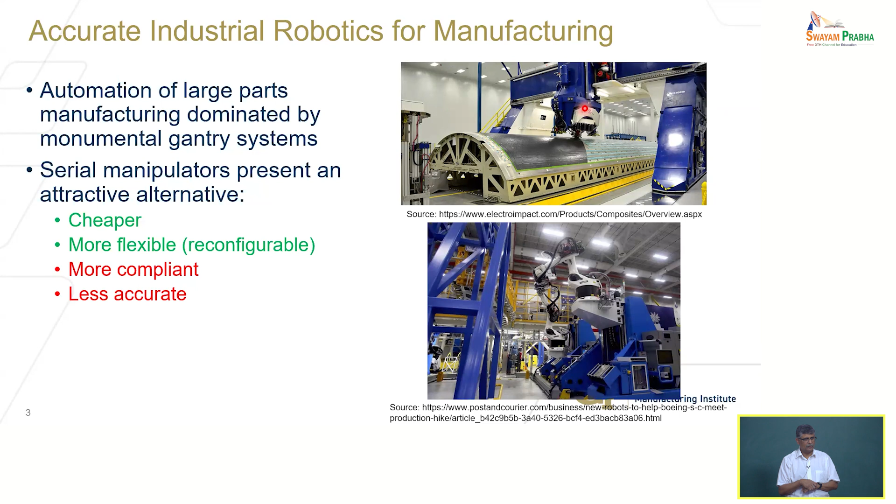So these are challenges with robots. This statistic you can take with a grain of salt. Very few robots generally, whether it's less than 2% or not, I don't know. Alex Verl is a professor at University of Stuttgart, a colleague and friend of mine, and we participated in writing a paper, and the Germans came up with the statistic that less than 2% of industrial robots are used for machining type applications. The only machining application robots have been used for has been in a foundry to actually cut out flash from castings.

That doesn't require very high accuracy. It's just removing excess material squeezed out from the mold during casting. Similar work on polishing and grinding has been done. It's done in industry today, but not for milling operations, where you produce complex contours that may be necessary for aircraft structures. Most aircraft frames, whether metal or even today's composite aircraft—commercial aircraft have composite skins—have to be machined, trimmed. You have to cut out holes. There are tens of thousands, if not hundreds of thousands, of holes depending on the size of the aircraft that have to be drilled. Then fasteners have to be put in, sealant applied, and fasteners fastened to the frame.

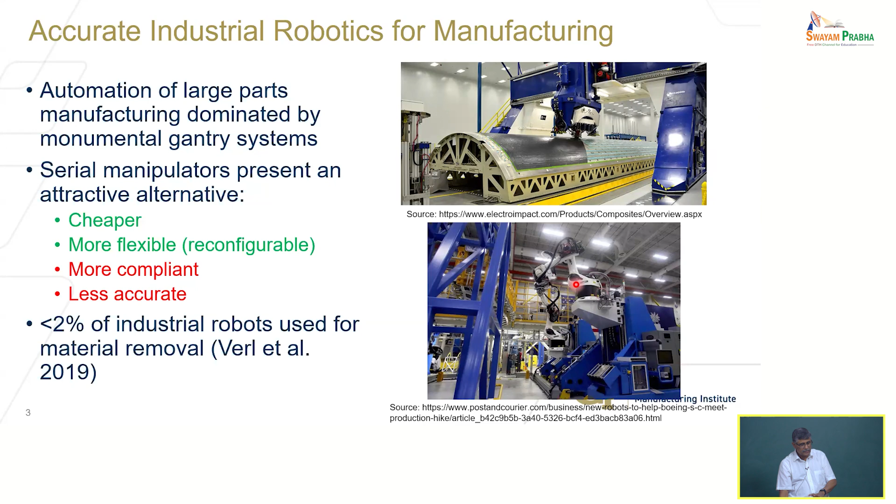Now, you see here an example—I don't remember this one exactly, but this is probably a robot doing drilling. It's called the QuadBot system, and there are 4 robots doing drilling. But here, the robot is primarily being used as a positioner, simply taking it to where it needs to go. They have enhanced the accuracy of this for drilling. There's an auto feed drill at the end effector that positions the robot at the right location and clamps down on the outer surface of the skin, gets a grip, puts the skin and frame together, clamps down, and then drills. That's the level of automation that exists today in practice.

Well, what motivated us to try and say, oh, we need to make robots more accurate than they are? Here's one example—I don't know how many of you know. If you've flown on an airplane, you may not have seen it, but you have sat on an airplane which exhibits these characteristics. Most airplanes flying today, actually all of them, when they're produced, are assembled. That assembly process is very time-consuming, especially for large planes—it could take a few days to assemble the wing to the body. Each fuselage section, depending on the type of aircraft, is made in separate parts: there's an aft section, mid section, forward section, and these are brought together and mated.

Now, if you think of composite structures, accuracy of manufacturing is difficult. They cannot be made precisely—the fuselage is not a perfect circle. It's some geometry, but controlling the geometry during composite manufacturing is difficult, so there are errors.

So when you bring two pieces together, like the wing to the body or two sections of a fuselage, to join them, there are gaps and there are interferences. So what do they do? They bring them together, measure them with very sophisticated metrology, then join them, measure again to see where there are gaps, and then go make shims, essentially materials used to fill the gaps, out of fiberglass, composite, or metal, depending on what it is. And there are thousands of them on an aircraft.

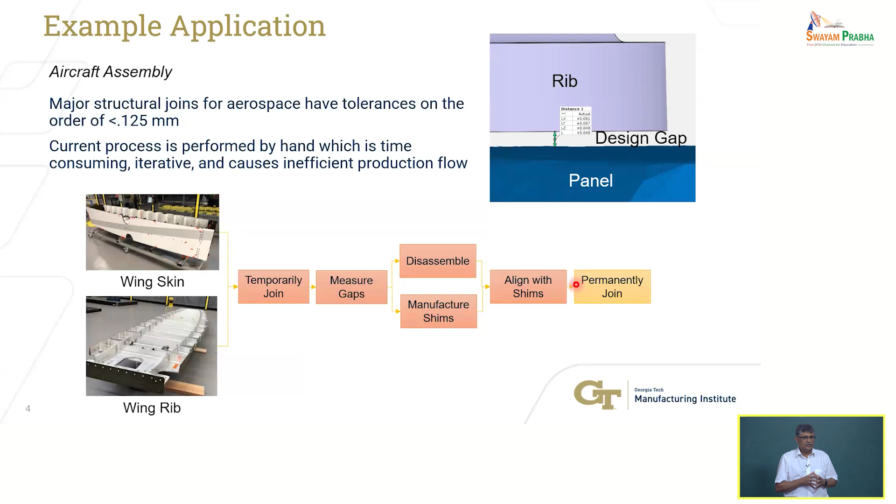So you're adding mass. Wouldn't it be nice if, instead of adding weight, which is bad from a fuel efficiency standpoint, you use composite to lightweight the aircraft, but now you're adding more material because of your inability to produce things very accurately? So what would be nice? These shims are produced in a machine shop and brought back, which takes time as well. Now think of this scenario.

So this is what I described. This is saying the same thing I just described to you in words. So what do they do? What is an alternative approach?

An alternative approach would be that I don't try to make my structures very accurate, which is good, it costs less to do that. Let's say I make one of the fuselage sections slightly larger on the inside diameter than the other, so there will be deliberate interference. Now I bring them together and measure how much interference there is. I have to do that. Then instead of making shims, I just bring a machine and machine it to size, so I don't need to add any new material. And I join the two. That would be called shimless assembly, without using any shims.

That is not done today. Today what they try to do is predict the thickness variations and make shims ahead of time, then do the assembly. So this is one motivation.

Now, if I have to machine this fuselage on the assembly line for a large airplane, I can't take a gantry machine there, or transport that big piece to the gantry machine at some other facility where the machine tool is. Instead, if I have a robot that's accurate enough, I can put it on a mobile platform that can rise up and down. I've measured where the interference is, and I can go and actually machine it to size. That's one potential application, not the only one. Robots can be used for painting, sealing, and all kinds of other applications, or trimming composite structures.

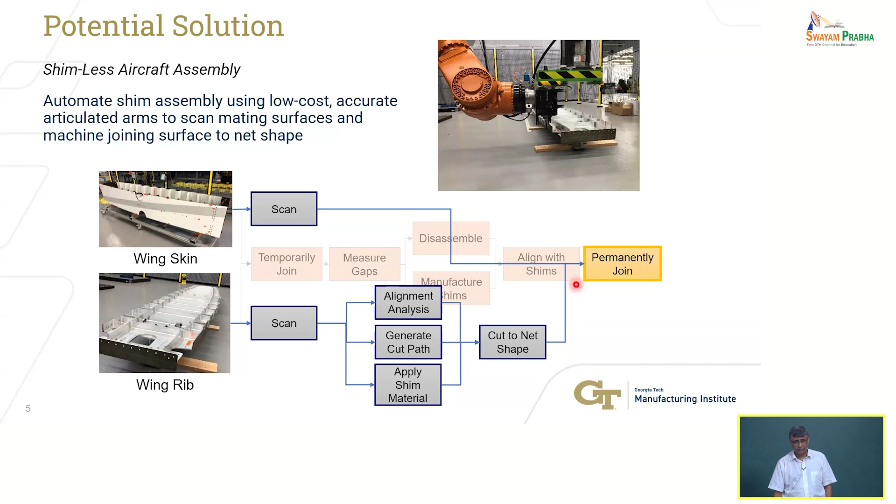To illustrate, this video shows a typical robot machining shims attached to a model wing rib. A wing rib is a rib inside the wing of an airplane. You can see it's a 6-axis, 6-degree-of-freedom industrial robot, similar to the one you saw but much bigger, with a much higher payload, with a machining spindle at the tip, and it's machining these fiberglass structures attached to it. These are shims that minimize the gap between mating structures.

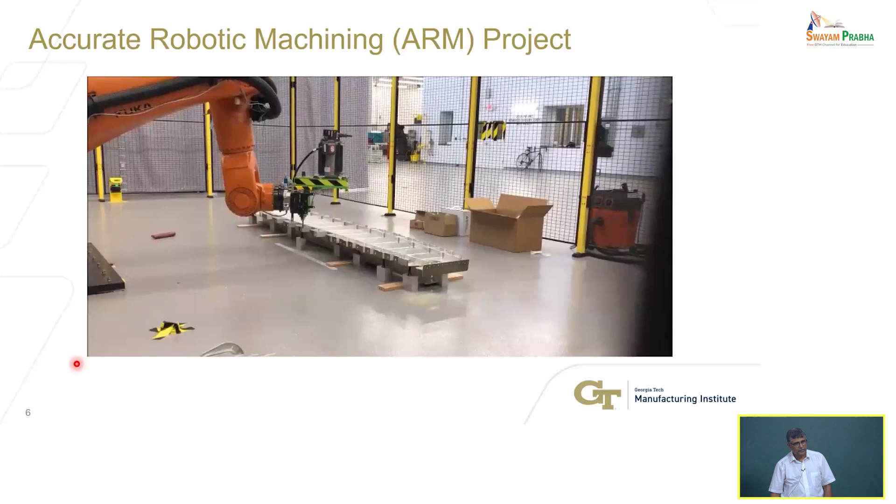So that is kind of the application. We want to be able to do that on the assembly line using such a robot. What makes it difficult to do today is the question. Robot accuracy is the challenge.

Most people don't realize robots—they think robots are very accurate. No, robots are very repeatable. If you buy a robot, the manufacturer will only quote you a repeatability value. They'll say it's repeatable: if you teach it to go to a certain point manually and ask it to go thousands of times, it'll return within 50 microns of that position, which may be good enough for many applications. That's repeatability. But accuracy would be, if I ask it to go to some specific point in space through an offline program, how close to that point does it actually go? And unfortunately, most robot manufacturers will not give you an accuracy number.

They cannot, because of many error sources that are there, some of which I mentioned earlier. So as a consequence, what happens if you were to do that? The best accuracy with the best calibrated robot might be slightly less than a millimeter, a few hundred microns if you're lucky. Well, that's not good enough for a machining application. If I can't position the robot precisely along its path to cut something within, say, 200 microns for certain aerospace applications, or less than 0.125 millimeters, it's not good enough. So repeatability is specified by manufacturers, but not accuracy.

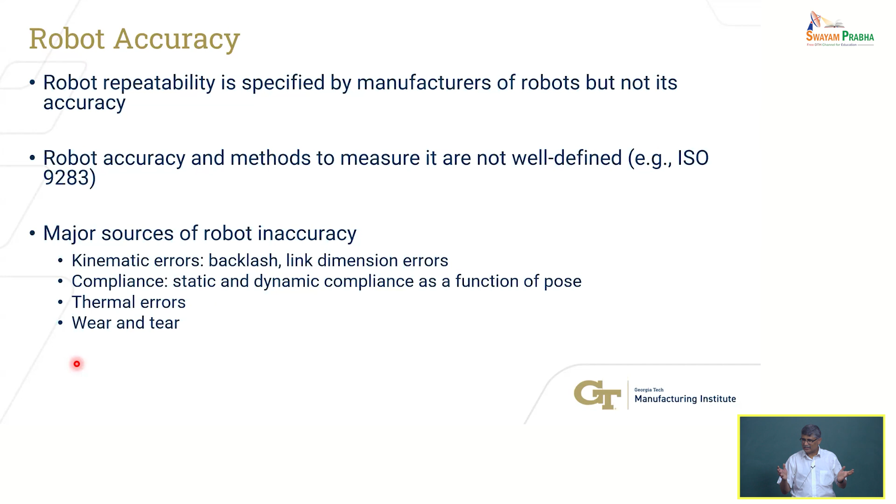There are other errors, like temperature variation. This is not even accounted for explicitly, though it's mentioned in the standard. In most manufacturing environments, like a foundry, the temperature variations can be huge, and thermal expansion and contraction effects can also affect accuracy, along with wear and tear. So, basically, if you have less kinematic accuracy than CNC machine tools, you'll have more inaccuracy of the part, along with compliance effects. I won't repeat all of this, let's move on.

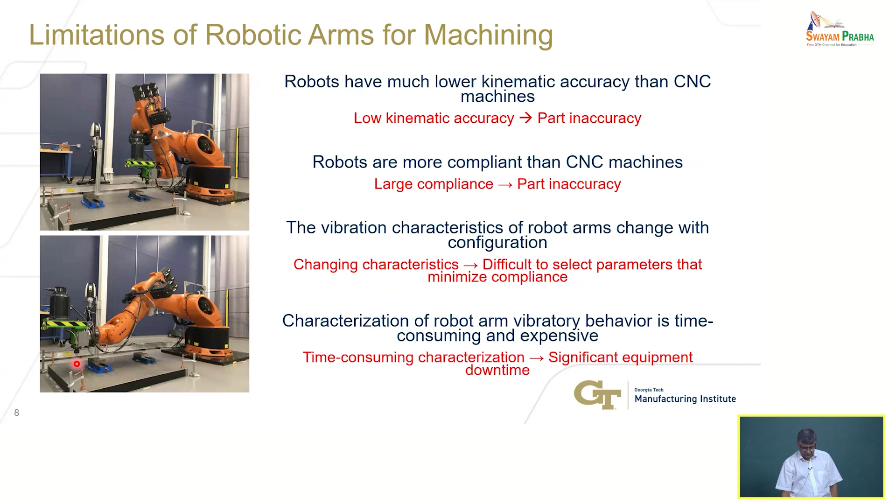So how do we go about addressing some of these limitations? That's what we tried to do in our research. One of the first things we did was ask: can we compensate for the static deflection if I were to use a robot for machining? Let's say I'm milling a slot with a robot - there are forces acting on the robot arm. Can I estimate what the forces are, and using knowledge of the forces, estimate the deflection based on the stiffness of the joints of the robot? I won't teach you all of this - if you haven't learned it, don't worry. Just take my word that you can use forward kinematics to relate joint compliances to the Cartesian compliance, and can I use that knowledge?

If I know the force acting at the end of my arm, and I know the stiffness at the end point of my arm, can I predict the deflection? You all understand F equals Kx, like a spring. So it's like a spring. I know K at this tip, I know F at any point in time and space, I can calculate X, right? F over K gives me X. That's the basic idea.

The mathematics is more complicated because your kinematics is more complicated, okay? So let's not worry about that.

So how did we go about addressing this? Machining is more complicated. Machining forces vary with time in a milling operation, particularly. And as you're moving, just like we were talking about micro milling, the milling tool moves, your arm is changing. The extension of the arm and position of the arm in space is changing. And as I already said, the stiffness of the arm changes with its pose. So you have to be able to predict its changing compliance. You have to predict or measure the forces somehow in real time, and then be able to estimate the deflection and compensate for it.

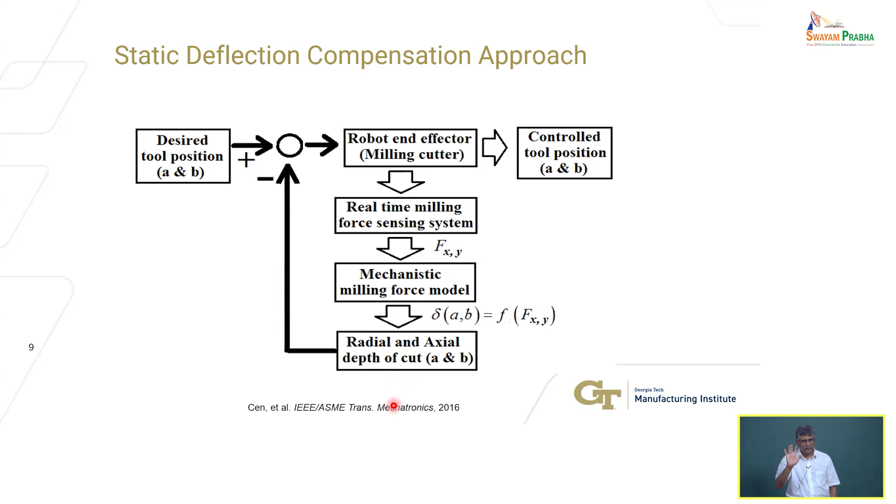So what are the things I need to be able to do this? I need some way of measuring the forces. I need this model that relates the force to the instantaneous depths of cut. And then I need to just be able to solve for these. As long as you understand the basic idea, don't worry about the mathematics of this. I'll show you some of the mathematics, but I don't want to confuse you more. I want you to just remember the basic idea.

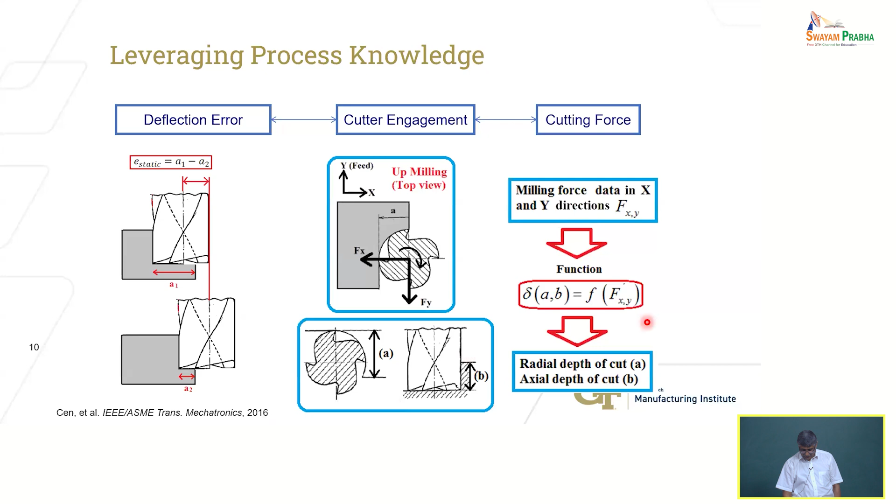Force, deflection. It's F equals Kx, that's the idea being used here. So I can compute it, I can do this. This illustration is simply saying the same thing that I described now.

Now, how do I measure the force? You have a rotating tool in milling. I mentioned before there is a piezoelectric force dynamometer that exists, but in practice you're machining a very large structure, and we don't have such big sensors. Now, there are rotating tool dynamometers available too. They exist. And for robots, you can buy force sensors that you can mount on the end effector, 6-axis force sensors. They exist. But in this case, what we did is we actually developed our own sensing technology.

This sensing technology is a very low-cost, non-intrusive sensing technology. Non-intrusive because you're not modifying anything significant, not modifying the mass or the stiffness of the structure on which you're mounting the sensor. That is what you want to do, right? I want to sense something without significantly modifying its characteristics.

So what is this sensor? This sensor is a thin film sensor, basically called polyvinylidene fluoride, PVDF, routinely used in many other applications. PVDF is a piezoelectric polymer film. It's the same principle as the other dynamometer referred to, the piezoelectric dynamometer.

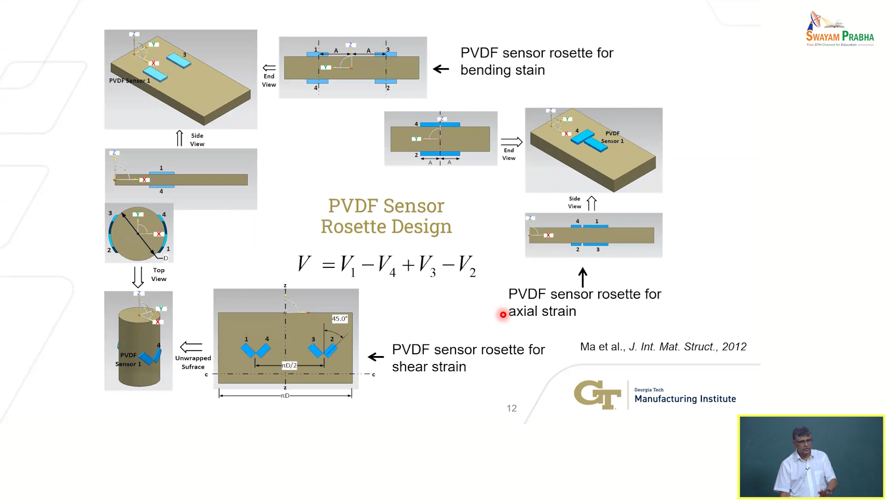I'll skip this. This is showing you how those sensor configurations are that allow me to measure the force I showed you. It's not as important. Let's see if this is showing you on a milling machine using the sensor that can measure torque. You can measure torque, you can measure Fx, Fy, Fz. You can do all of those things with the sensor.

This shows you measurement of the torque in a milling operation with that sensor. The red is with a dynamometer. That is the gold standard, a tabletop quartz-based piezoelectric sensor that some of you mentioned, people use in research, but you can't put that on the robot arm. So this is showing you that using this thin film sensor, you can get similar performance or similar measurement characteristics as you can with that more expensive one.

That dynamometer can cost you $20,000 to $30,000. That's what it costs. I don't know how much that translates to, but maybe 2 lakhs or 3 lakhs of rupees, whereas this sensor is $5 or maybe total $100 cost, which is about 8,000 rupees, or 9,000 rupees.

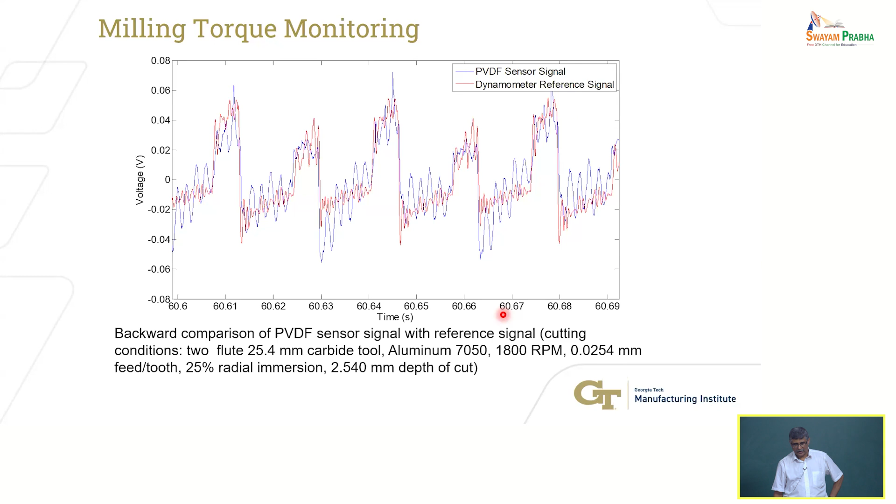How do you use this PVDF sensor in your work?

If you want to use regular strain gauges and measure strains, then you have to build a Wheatstone bridge circuit to measure the strains and separate out the different strains. It's the same idea, but we are using 4 just to be safe. They are mounted on the periphery of the shank of the end mill. And as the tool is rotating and subjected to forces that are changing during cutting, it is undergoing these strains. These strains are being measured, and are being transmitted and converted into force. Does that make sense? At least conceptually it makes sense. All the math I'll skip, we don't have time for it. As long as you understand that, then you're fine.

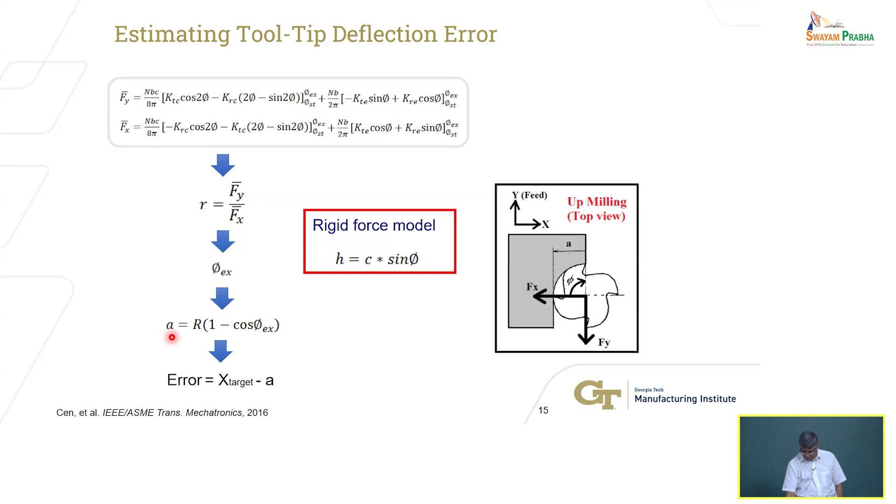Now, we implemented this to see how well we do. Does it improve my accuracy? Which accuracy am I trying to improve? In this case, the radial depth of cut accuracy, because I'm estimating only that using the sensor, and I'm compensating for it in real time, making the robot move.

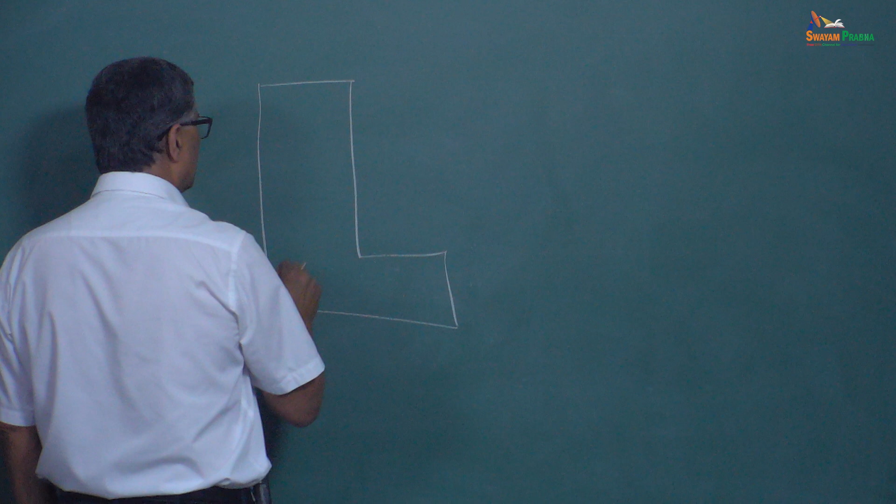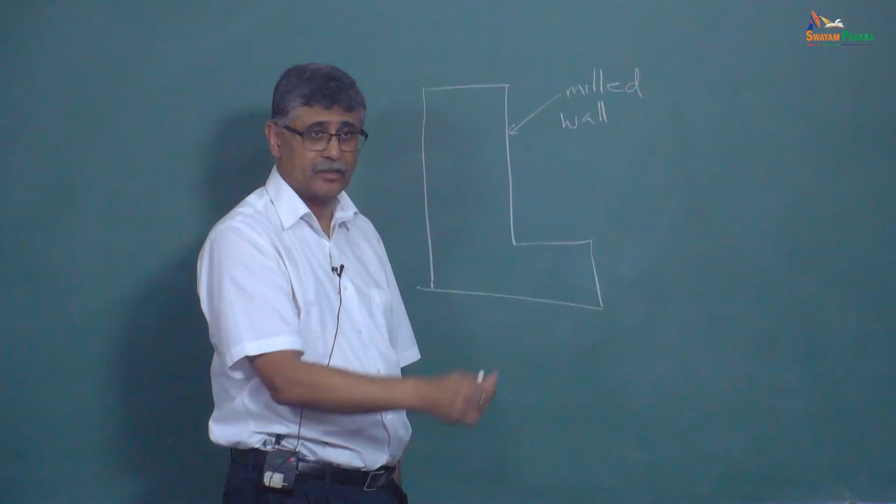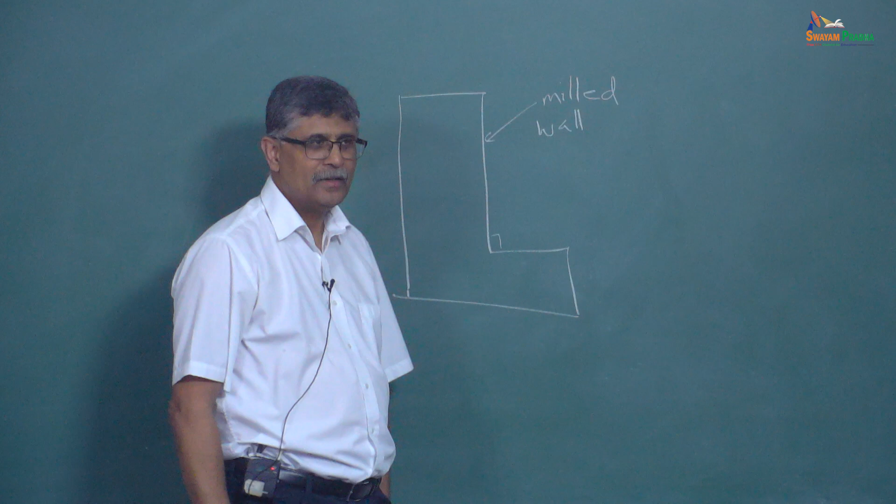So what this is showing you, imagine this is the milled wall location after machining. If you're doing a milling operation on the side, you create a step, something like this. Let's say this is the wall that I cut, looking at it from the end, or in cross section. If my robot was perfectly rigid, this should be 90 degrees, right? The robot is not rigid. Even a machine tool is not perfect; the cutting tool is also not perfectly rigid in a machine tool. So there will be some variation. Now, the tool is fixed here, up here, the robot is here, the machine tool is here. It's like a cantilever beam.

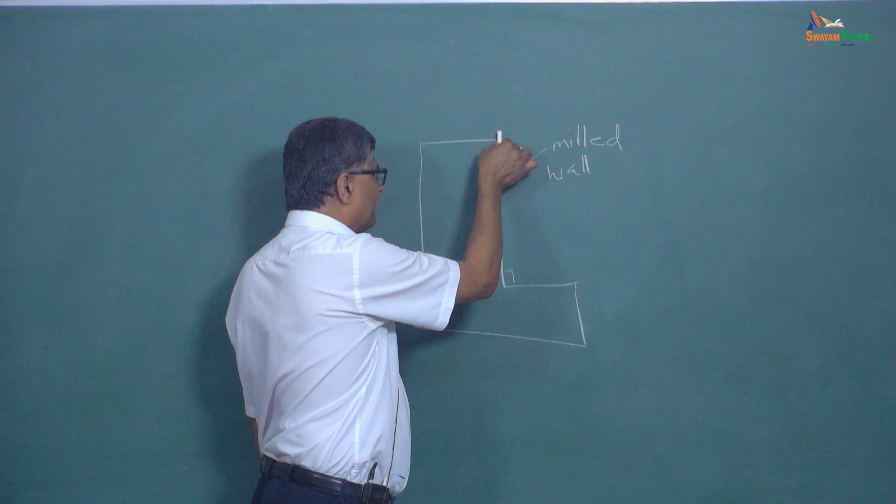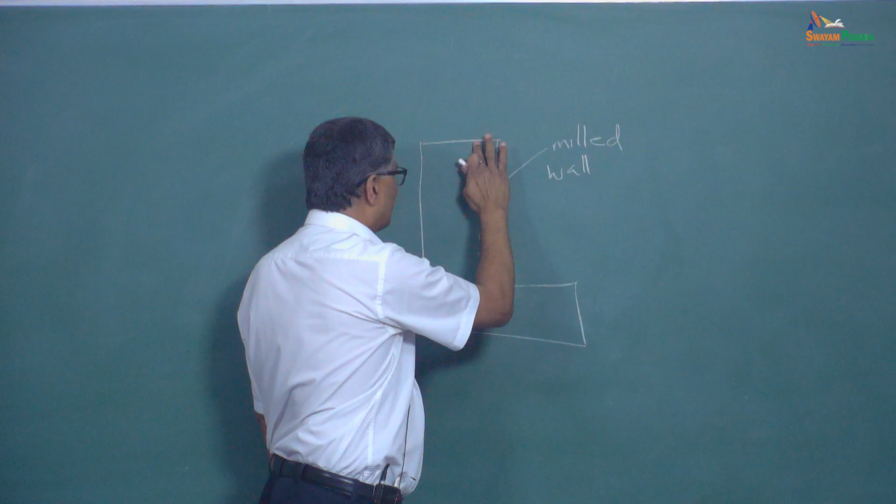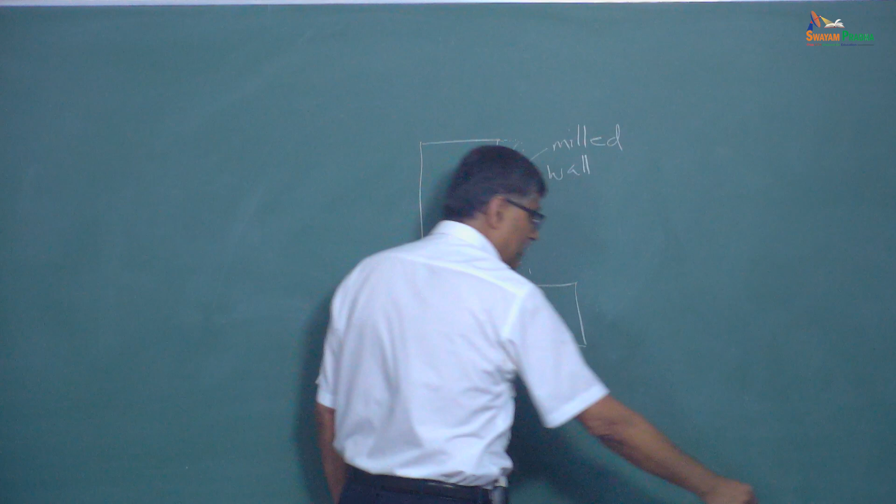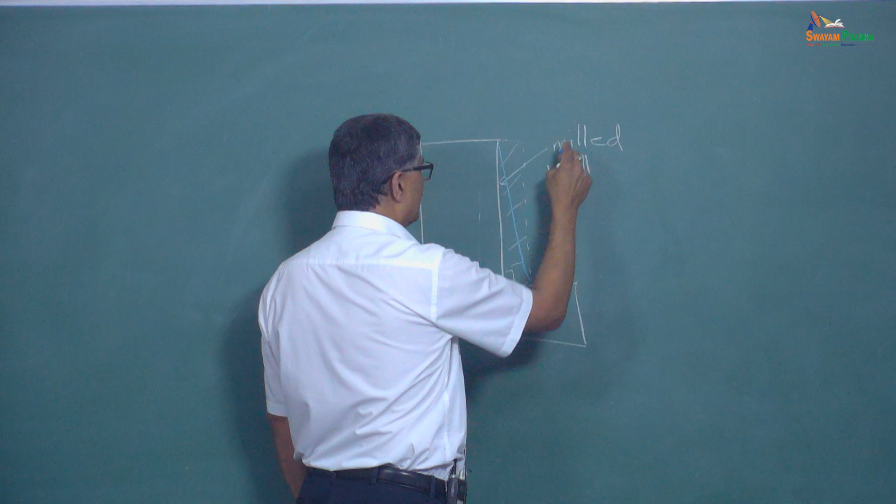So because of that, what do you expect this wall to look like in reality? It's going to deflect away, like this, which means I'm going to cut less here and more there. The radial depth will vary. Nominally, it should have been this — let's say if this was the final milled wall, maybe I removed this much. Nominally, I was supposed to remove all of this material, but because of the deflection, I don't actually remove all of it. I only remove something like this. So this is the real wall. Let's say the ideally milled wall is the white, and this blue is the actual milled wall.

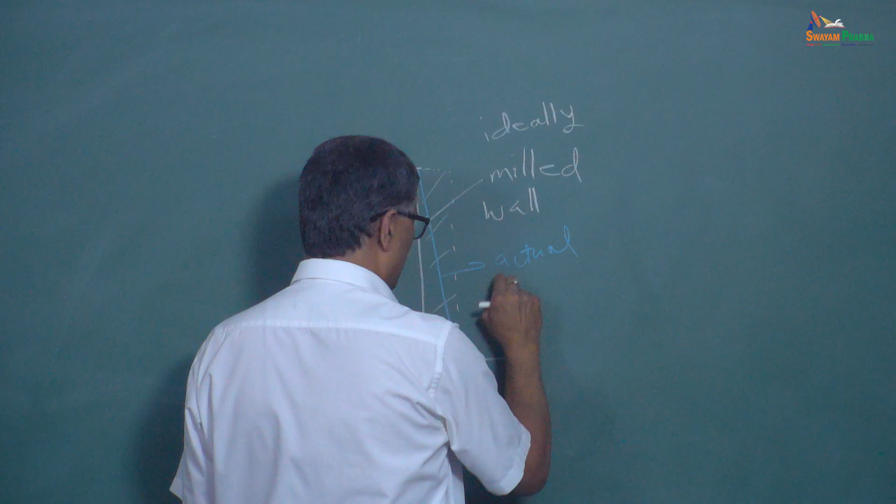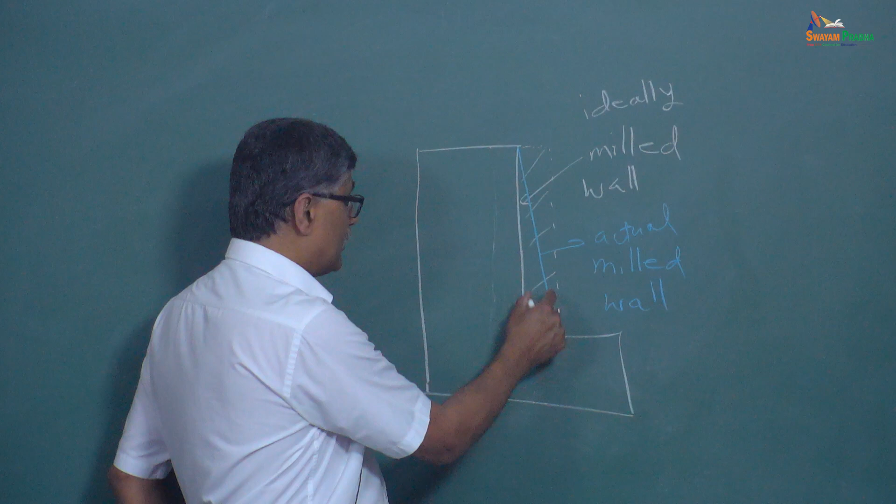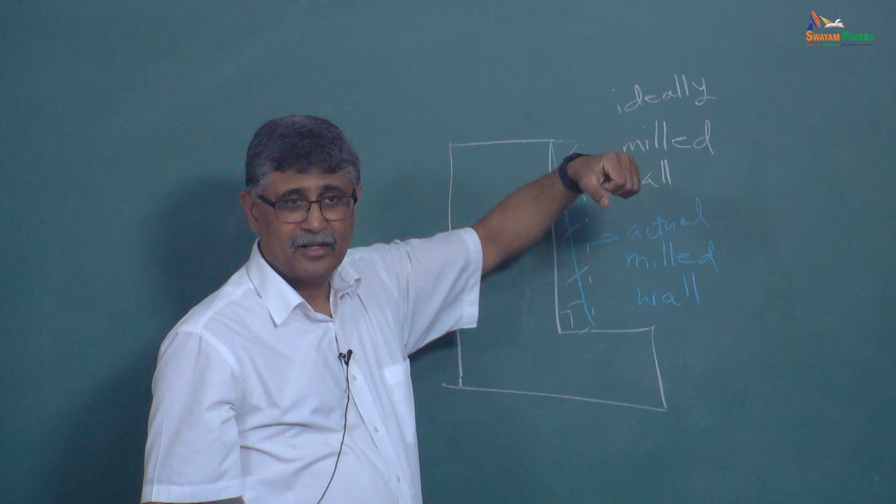So if I were to erase all of this white, there's this much error along the axial depth because of radial deflection. Think of a cantilever beam being deflected away—rigid where it's fixed in the spindle, free at the end, so it's going to deflect away. Does that make sense?

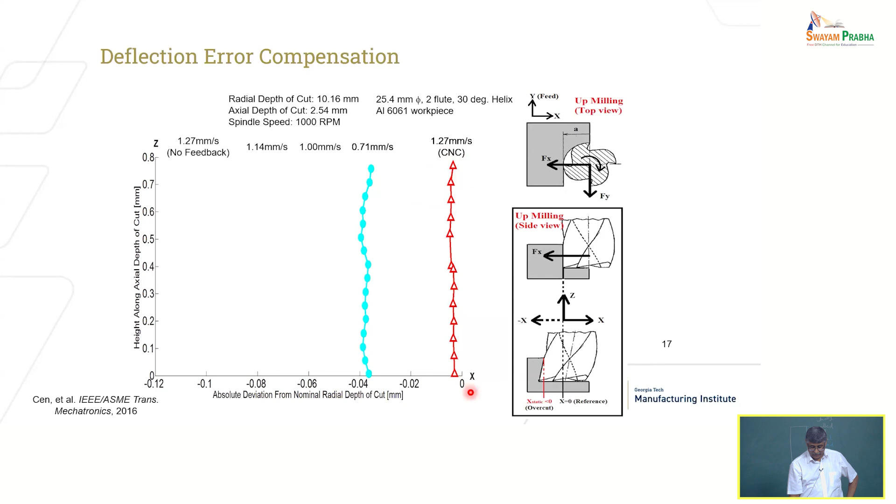So what I'm showing you here is the measurements. This is showing you at some feed, if I perform this operation on a milling machine, a rigid regular machine tool, the cut wall is almost perfectly straight.

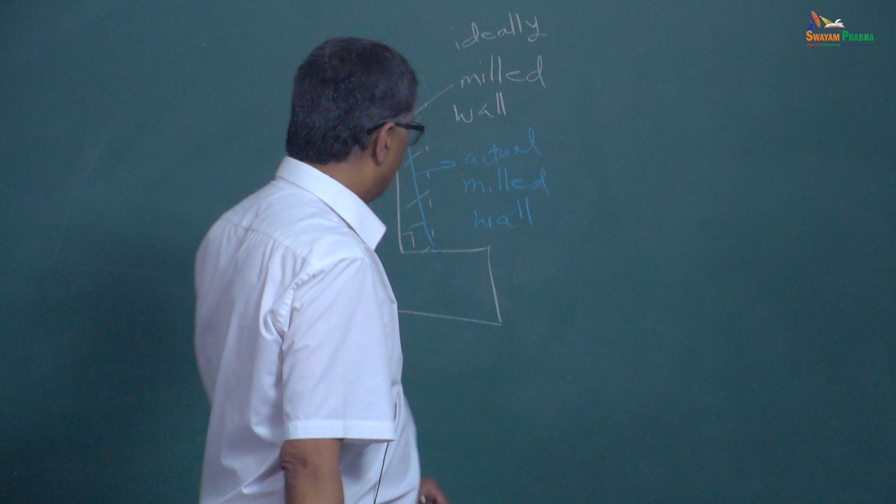These are measurement points along the axial depth—measuring here, and so forth. Those are the points that you see. This is on a robot, okay? All of these are on a robot.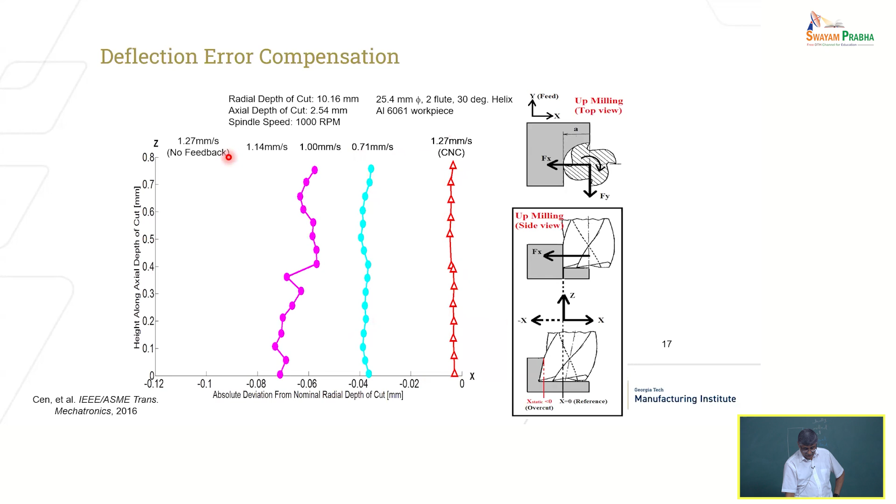You can see here what happens if I increase the feed, which means I increase the force—I'm removing more and more material. There'll be greater force, greater deflection, and clearly I have much greater error. This point is 0. This is on a machine tool. Relative to a machine tool, the best I can do is here—this much error is there.

If I increase the forces by increasing the cutting condition, it gets worse. You can see deflection is like this—right? That's what is happening.

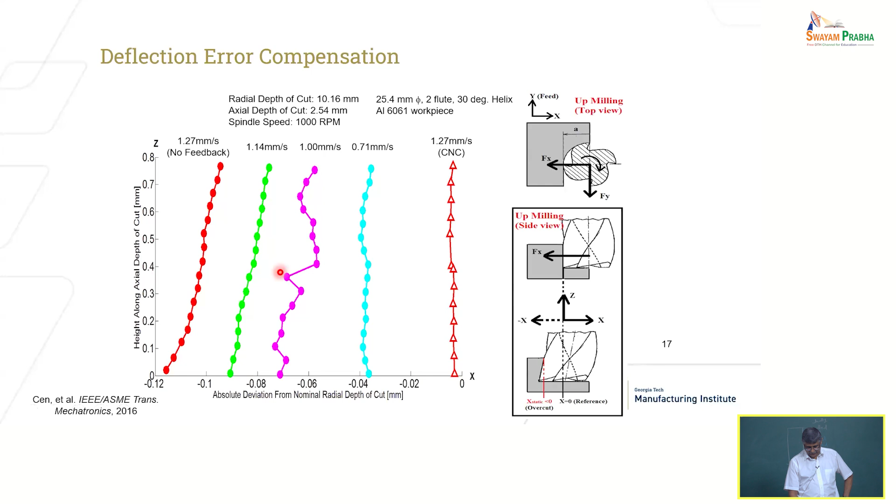So now, if I were to use feedback—remember, this is what I showed you. This is the highest feed, no feedback, no compensation. Now I apply compensation using the sensor, estimating the value, feeding it back, and you can see I reduced it substantially. There is still error—it's not as good as a machine tool, but I reduced it. It's closer to this machine tool result, the rigid machine tool result.

The idea is not to replace the machine tool. You can't use the machine tool in this application, but can I get a robot to be reasonably accurate so it can perform the operation, because it's more flexible? I can do this on an assembly line for an aircraft structure, but I can't take a machine tool there. So yes, I'm willing to sacrifice some accuracy—obviously this level of accuracy isn't required for this application. Then it works, right? But I'm able to improve the accuracy.

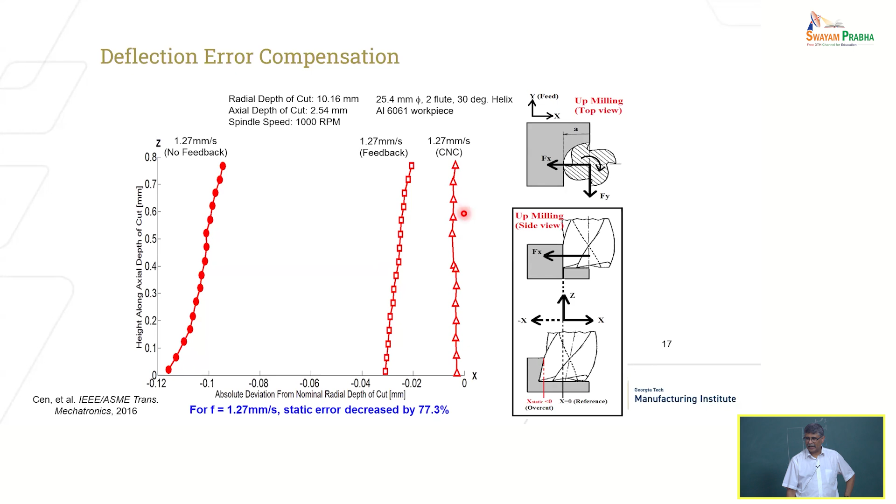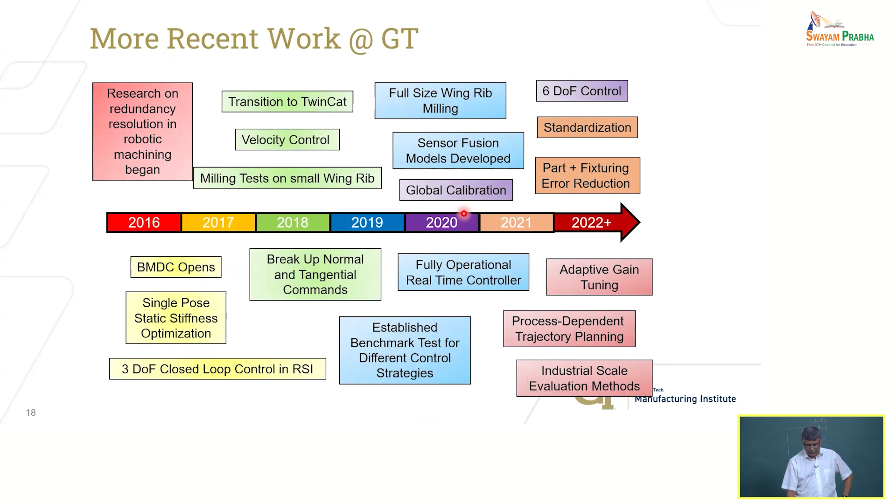Okay, so that is our first attempt. I won't go through this—it shows many things we have done, ways of compensating for errors, all kinds of things: better modeling of the joint stiffness properties, velocity control, sensor fusion, all kinds of things which I don't have time to go over. There's too many things going on there. So this is our system.

What I just showed you is where we used a sensor to measure forces, indirectly estimate where the tool is in the cut, and then compensate. Wouldn't it be better? How is it that we as humans are able to very quickly—if I want to grab this chalk, I did that. I want to pick this up, I did that, right?

What's making me do this, right? Yeah, what is it? So my eyes observe where it is, communicate with my brain, and my brain actuates my arm to go pick it up, right? There's a closed loop system here.

Now, if I have an analogous system, a set of eyes—yesterday you guys saw, maybe they said they had a camera on the robot arm. I don't think they demonstrated it, but they want to use that camera. So a camera is not sufficiently accurate to do what we want here. The precision you can infer from cameras is okay for autonomous guided vehicles or driverless cars—you're not trying to achieve hundreds of microns accuracy. As long as the car doesn't hit me, being a few millimeters away is good enough for that application. But it's not good enough for a machining application. So we need a better set of eyes, okay?

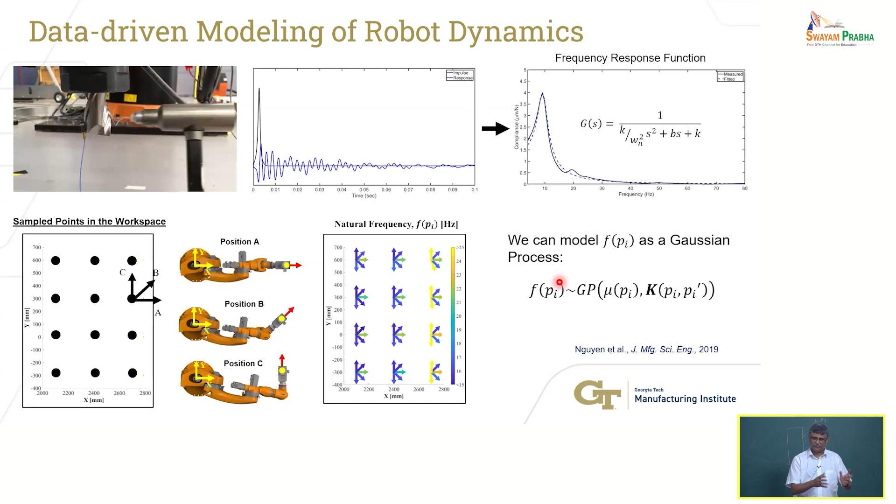I can take all of that data and interpolate, fitting regression functions that describe how the natural frequency changes as a function of location in space, how the damping ratio or coefficient changes as a function of location, and how the stiffness changes as a function of location in space. I can do this.

Let's not worry about the details. What's more important is that it shows these things are not constant, they vary. If my arm is outstretched, intuitively, as I already explained, the stiffness is not going to be as good. If it's not outstretched, the stiffness is going to be better. The data shows that, and now I can fit a model.

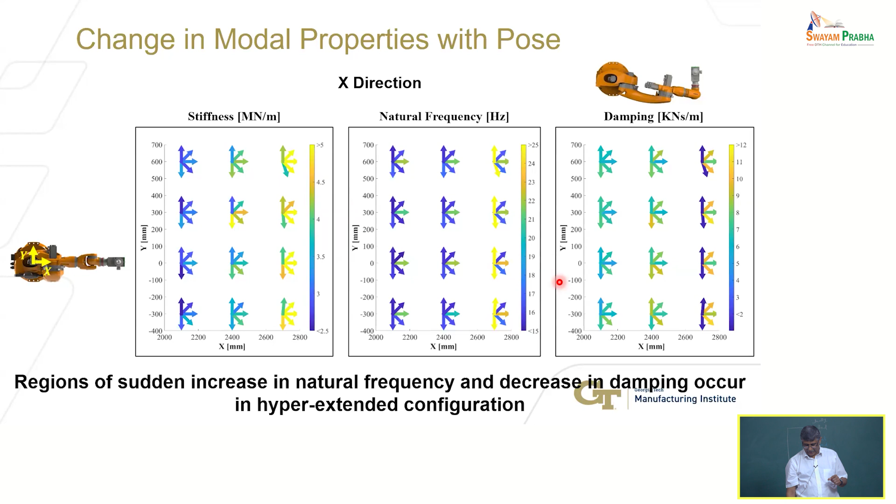I can use that regression model to estimate: if I'm at this position, what is the stiffness? What is the damping? What is the natural frequency? I can determine that from this model. It's an empirical model.

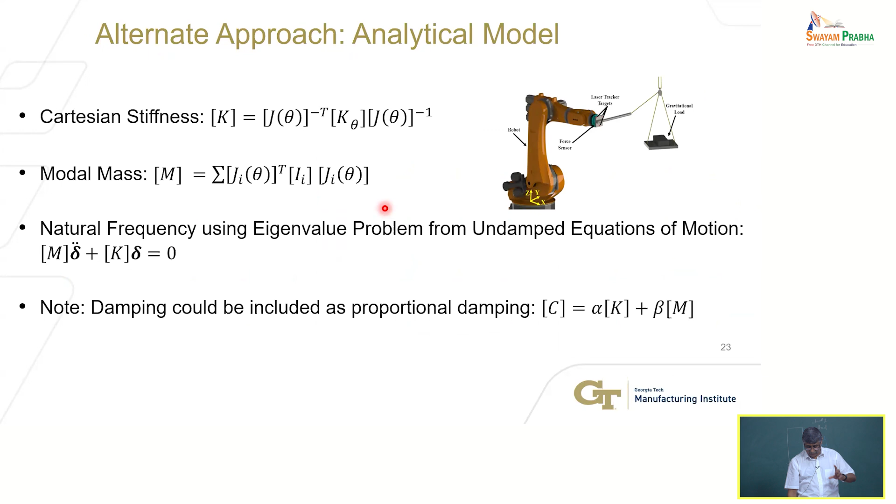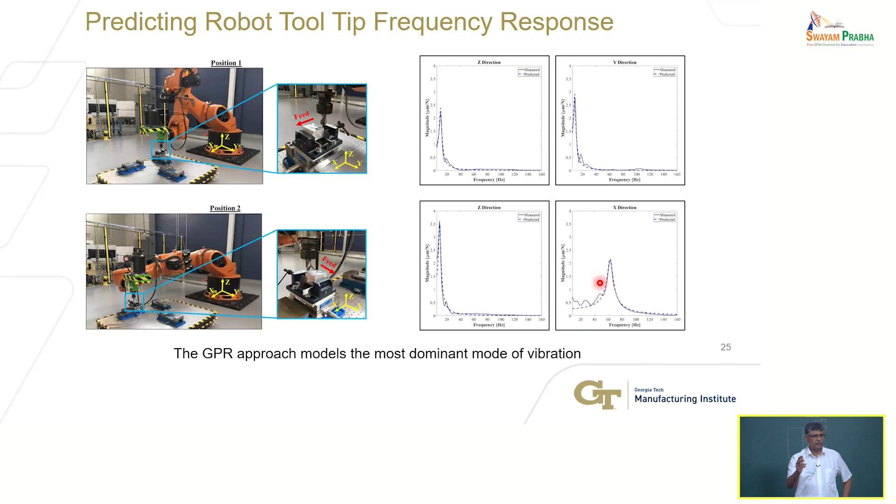That's what these plots are. This is showing you what the frequency would be if I would actually do this in this pose and this position. Now what I've done here is I can take that model, these regression models of stiffness, natural frequency, damping, and for those of you who understand system dynamics, for a second order mechanical system...

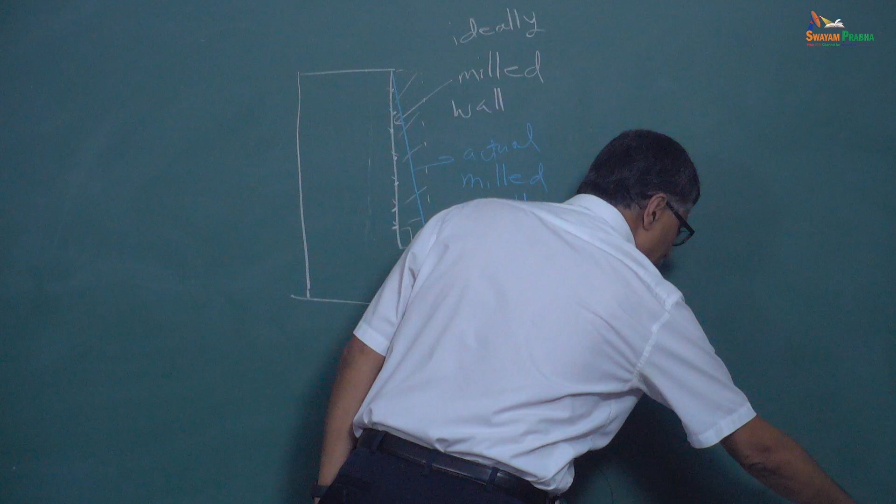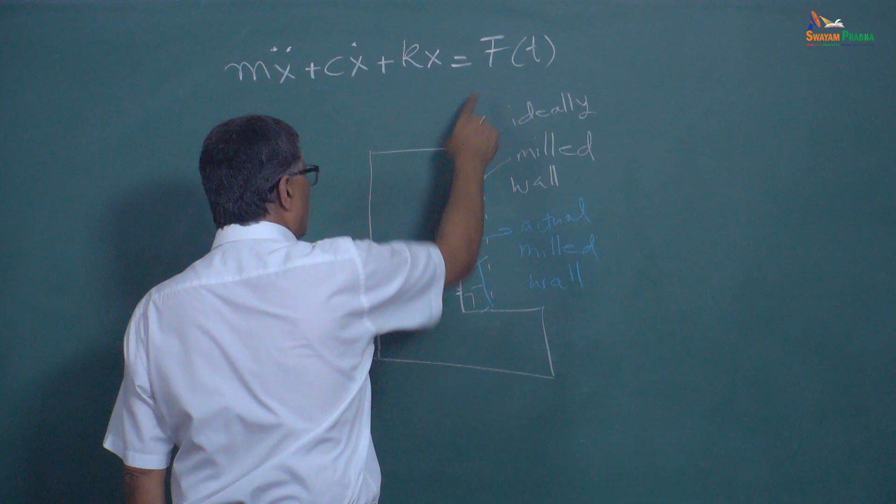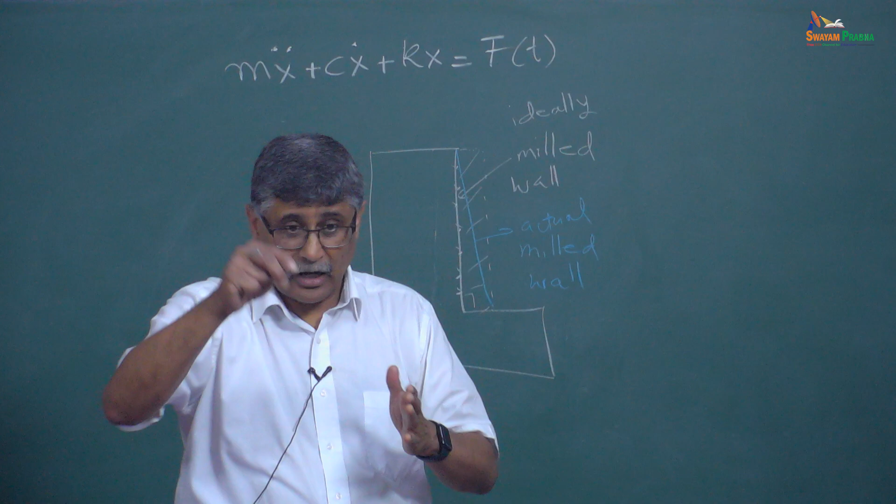Something like this, a second order system, m x double dot plus c x dot plus k x equals f of t, right, this is a function of time. So this is the forcing function, the cutting forces. This equation describes for a typical mechanical system, a second order ordinary differential equation, that you can solve for x, how that x varies, which is the vibration, in response to that forcing function.

If I go in this direction, outstretched arm, it's going to be stiff, right? So that's the X direction. I'm going in the Y direction. So it turns out when I'm going in the Y direction, the vibration in the X direction, peak to valley, is high. The reason it's high is because the natural frequency of the structure is quite high.

And it so happens that the cutting conditions I have selected are close to the natural frequency, so it will cause resonance. So now I'm going to excite the structure at its natural frequency, or very close to its natural frequency. It's going to vibrate violently. That is the reason why.

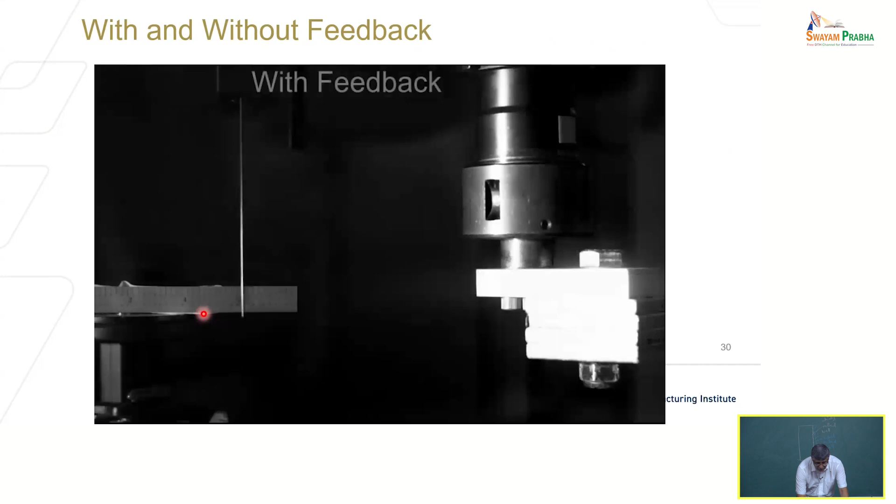Here's the implementation, without any feedback. What you're seeing is the end effector of the robot, zoomed in. I've mounted a spinning spindle, removed the cutting tool, and put an offset mass there, offset from the axis of rotation, so there's some eccentricity.

If I put a mass offset from the axis of rotation and spin it, I apply centrifugal forces at a periodicity based on the rotation frequency. So I'm applying a sinusoidal force of known magnitude and known frequency. That's the simplest type of excitation I can provide, which I know exactly. In machining you could argue you don't know the exact forces, you can predict or measure it, but for simplicity here I'm exciting the structure at this known frequency and amplitude of force.

So I put this offset mass at the end of the robot arm, spun it, and attached a thin rod to it. This rod vibrating is the robot vibrating in response to this sinusoidal excitation. What you saw previously was how it vibrates with no feedback compensation using this optimal control methodology, which accounts for the predicted vibration. You can see it's vibrating at the same frequency as the excitation.

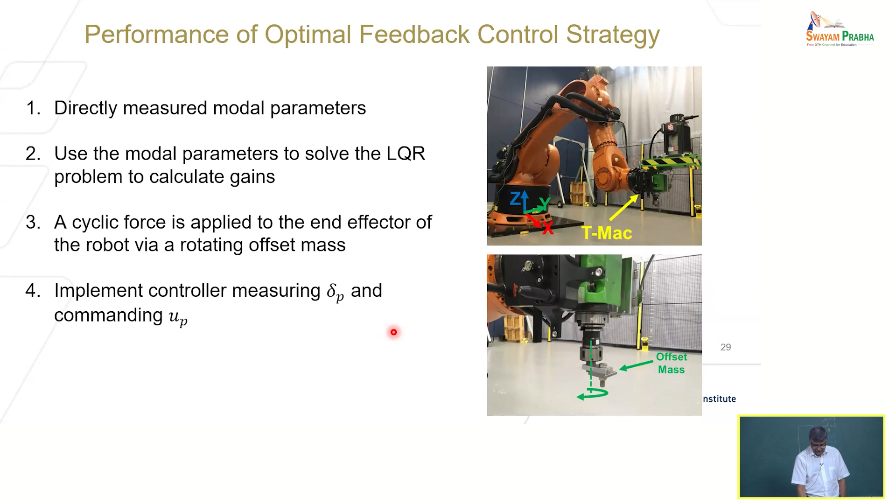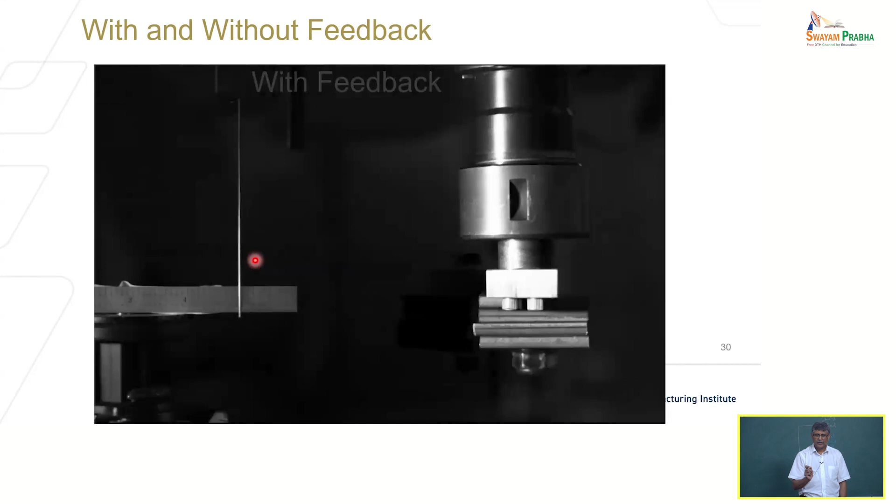This is with feedback, it reduced the amplitude of vibration, you can see. If you didn't catch that, let's do it one more time. No feedback, pay attention to this wire. And now with feedback, you can see how much it reduced. This is only at one pose, but I can do this at different poses as the robot is moving. Get the idea?

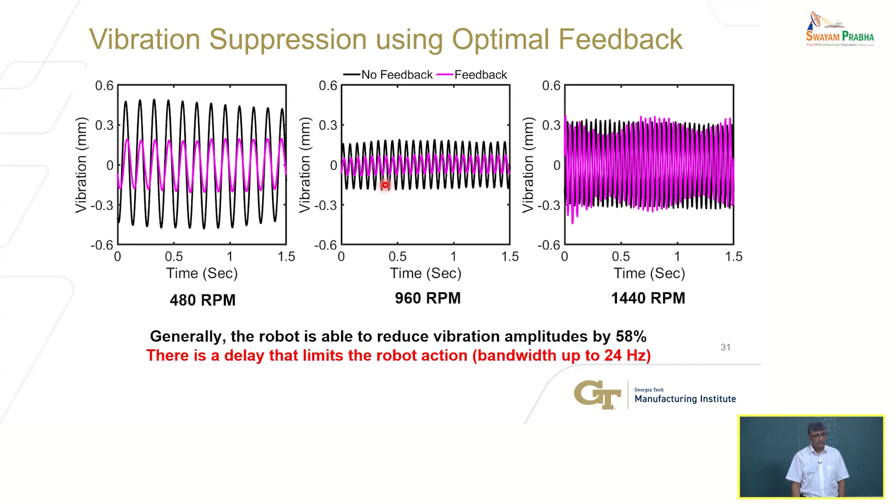Now what happens at very high frequency, I'm close to resonance, that's why I'm unable to compensate as well. There is a limit to how much I can compensate. That's what this is pointing to. Let's leave this, I'm not sure it's as important, but you saw this already.

So this is during cutting, actual machining, using that same model and strategy, seeing how much I can suppress vibration. The pink represents the controlled cutting operation using those models and the feedback gains I computed as it changes position. So you can minimize and suppress these vibrations, is what this suggests. Okay, I thought I had more, but maybe I rushed through.

I quit some things, but I see that not everybody has the kind of background required for some of these things I'm talking about. Hopefully what I've conveyed to you is that industrial robots are not accurate enough for applications like machining, out of the box, unless you're doing very low accuracy applications.

These robots are being used today for relatively low accuracy work, or you're teaching it to go only to one point, like in automotive spot welding. You can see videos on YouTube of lots of robots doing spot welding in an automotive assembly line. They've been used for a number of years, programmed to go there, and they do a very good job.

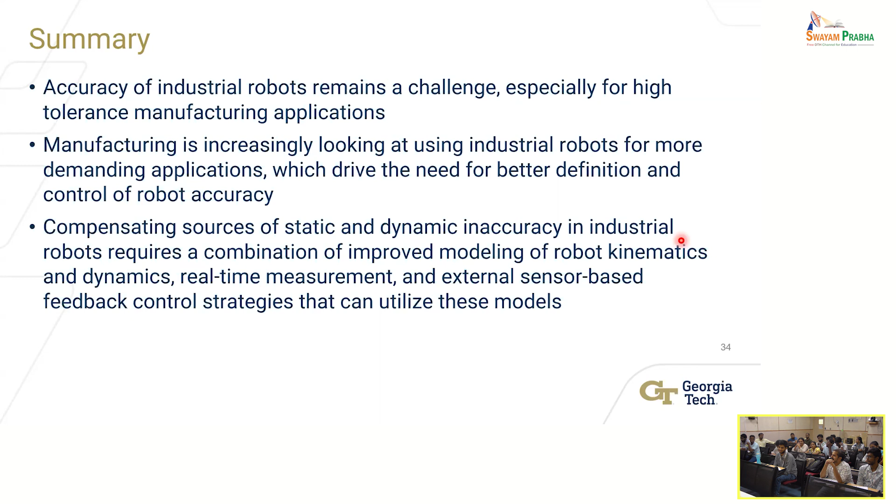All right, so I will stop there. So we have about 30 minutes or so for discussion, Q&A. Maybe this was even more complicated stuff than yesterday. Yes, please, go ahead.

This may not be in the scope of industrial robots, but I have seen parallel manipulators in robotic surgeries. They are highly accurate, and doctors have been using them. So is there any chance of using that kind of concept for these applications?

Parallel link manipulators have been used and tried actually back in the 90s. There was a parallel link manipulator-based machine tool called hexapods. Commercially available machine tools were built for aerospace type applications. But the challenge is that the work volume is reduced. If you use those Stewart platform or parallel link manipulator type structures, you can get better stiffness and maybe even accuracy over the work volume, but the work volume is not as large as a serial link manipulator. So they have their uses, but I am not aware of anybody necessarily using a parallel link manipulator for machining, even though people have tried it and even produced commercial grade, industry grade machine tools. I've seen them in the 90s, but I don't know who is using them.

There are things like something called flex picker. If you go online and search YouTube for flex picker, it's like a flexible parallel link manipulator arm that very rapidly does picking, designed for agricultural picking, picking things from trees. That's a hard problem also, but people have designed these things for those kinds of applications. So there are some advantages of those type of systems.

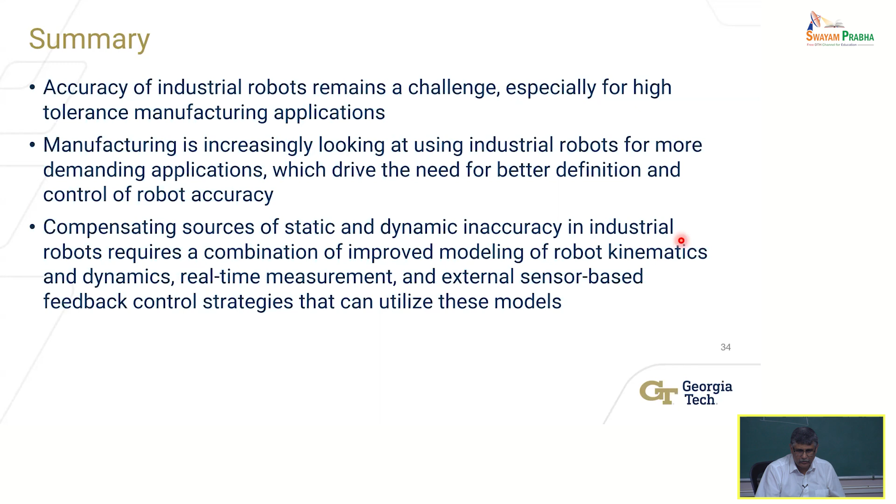Well, so you mean to say how in terms of actual hardware? So if you look, okay, so I kind of glossed over it.

So this is kind of the high-level architecture. Just like yesterday you showed us your setup, right? You have a Yaskawa robot, which has its own controller. So we have a KUKA robot, which has a KRC4 controller. The controller controls the motion of the robot. You can program it. But what we have done here is we have an external PC. The external PC is running a real-time operating system. This real-time operating system is called TwinCAT.

It's actually an industrial strength real-time operating system environment that you can run on a PC. So it creates a real-time shell. It's from a German company called Beckhoff Automation. Because KUKA is also originally German, they're designed to communicate. You can actually communicate with the robot controller through a feature called RSI, which stands for Robot Sensor Interface. And you can communicate with this robot every 4 milliseconds, nominally - sending it corrections to the nominally programmed path. That's one way of doing it.

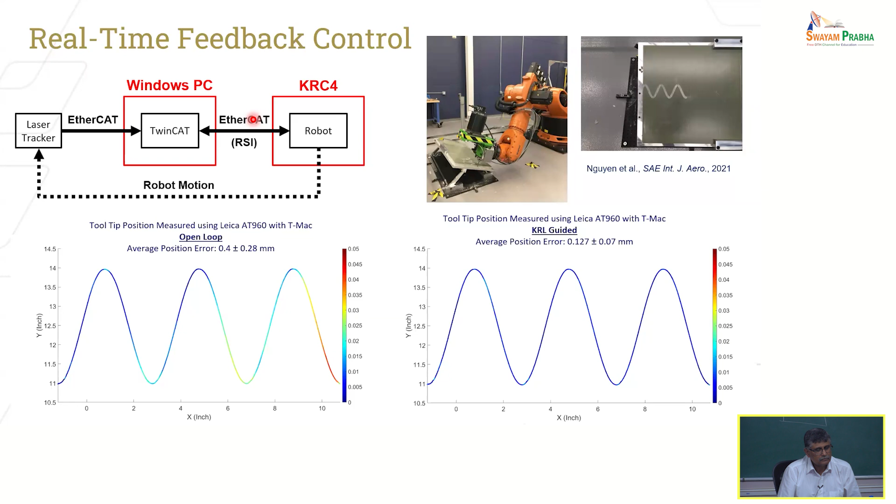Oh, I didn't really go over that. Let's see if I have any information here.

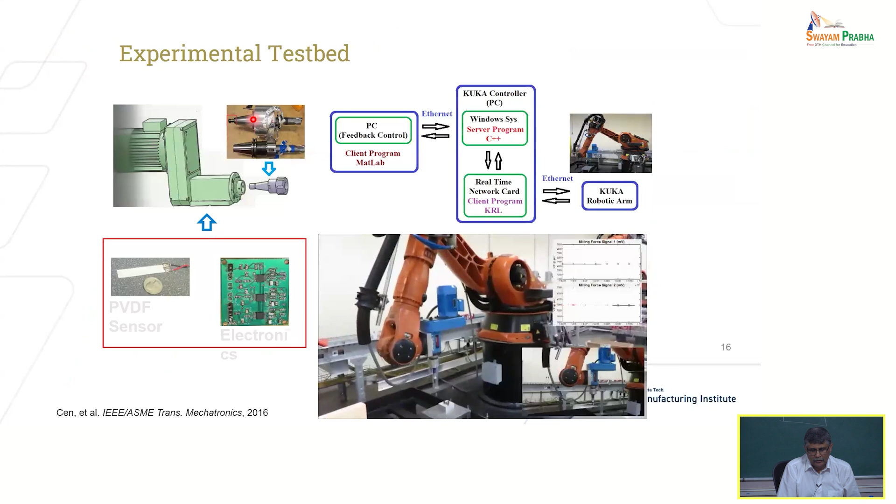So we designed our own electronics, a circuit board, with a microcontroller on it, and onboard memory and onboard battery. That's all in this housing that you see here. We have documented it in the papers—I can point you to those papers, okay.

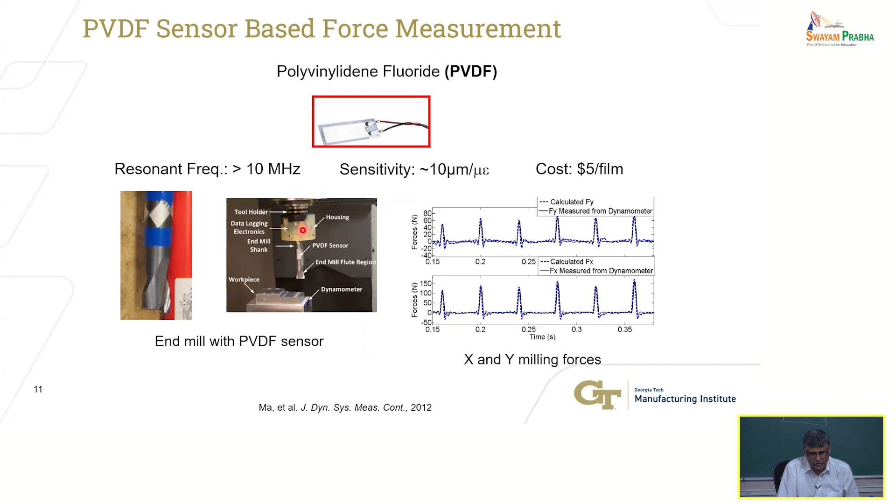And then you see our first version of it here, right. Then we have another version which we did on a Siemens project, where we actually took all the electronics which we had done manually. My student actually put the printed circuit board together himself, and a wireless transmitter and receiver as well that you need.

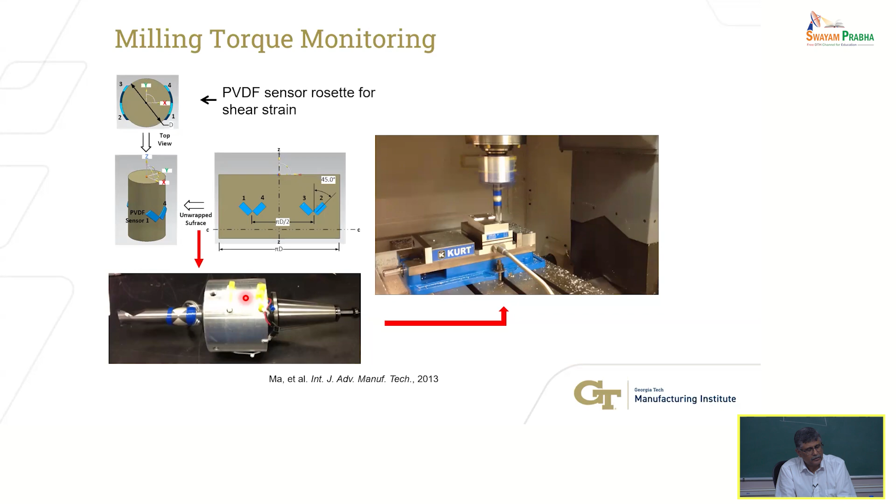We got it all prepared as a flexible printed circuit board, so that can be simply wrapped around and attached to the tool holder, so it becomes part of the tool holder. We did that for a boring bar project, actually, for Siemens. That's also published, you can look at it from a few years back. That'll give you some idea of how we did that.

Sir, I have a doubt. You're saying that robotics, CNC machines are more accurate than robotic machines. So in CNC machines, like 12-axis, 10-12 axis machines, they will also vibrate here, since they are also like a cantilever beam only, so the vibrations will affect the accuracy of the machine. Yeah, absolutely, there's vibration in machine tools too. This is much more compliant than a machine tool, that's the point I'm making. It's not that you don't have vibrations in machine tools, but you have much more severe chatter vibrations in a compliant arm like this. This is more susceptible to it.

The other difference is that in a machine tool, the change in compliance characteristics of the robot over its workspace is negligible, minimal. You can assume it to be constant, its stiffness characteristics with pose, even on a CNC milling machine. You can't do that here, its stiffness changes with pose. That's well known and well established, significantly enough that its static deflection properties, static compliance, and dynamic behavior change. That's very different than a CNC machine tool, including your dual spindle machines or whatever. There are machine tools where people will actually add a robot arm to the end effector, to the spindle. Then you're introducing more significant compliance potentially. There are such systems I've seen, but even then the entire structure of the CNC machine tool is so much stiffer, that's not the case here. Keep in mind, there you have linear slides and guideways, much stiffer, versus your revolute joints here.

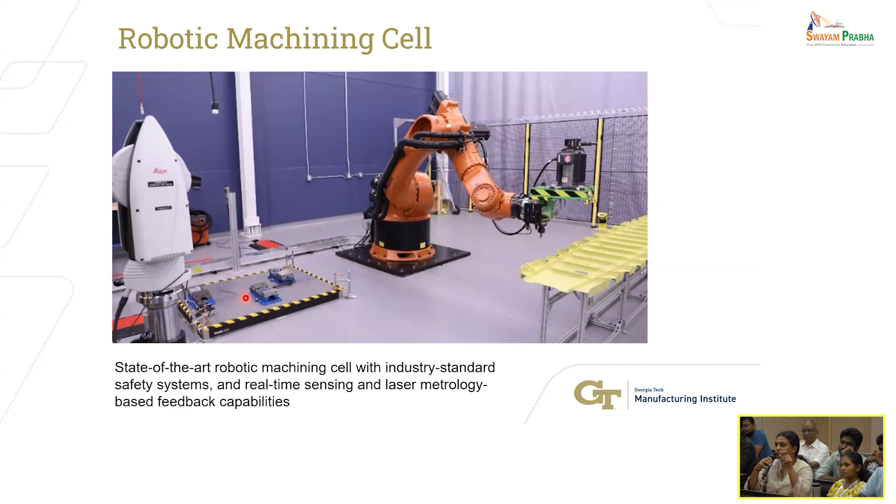So in one particular video, I think, you offset the workpiece from the axis, and then you found out the vibration. After that, with feedback, you reduced the vibration. I'm asking why did you offset the workpiece? So this is the one you're referring to, right? This video where you have an offset mass spinning around the axis of the spindle, so it's an eccentric motion. You have an offset mass hanging away from the axis of rotation, and you're spinning it at some frequency.

So effectively there's a periodic excitation that you're subjecting it to, and it's sinusoidal - pure sinusoidal excitation of a certain amplitude and frequency, which you know. I've designed the mass, I know the rotation frequency, so I can describe this as y equals a sine omega t. I know what omega is, I know a, the amplitude. So it's essentially a prescribed forcing function where I know what the forcing function is explicitly - mathematically I can describe it. So I can test how well my feedback control algorithm works. The reason to do this, as opposed to machining, is that in machining and milling it's not a pure sinusoidal excitation - it's a periodic excitation, like a Fourier series, a superposition of different frequencies. So it's not as simple as y equals a sine omega t. To keep it simple, we did this.

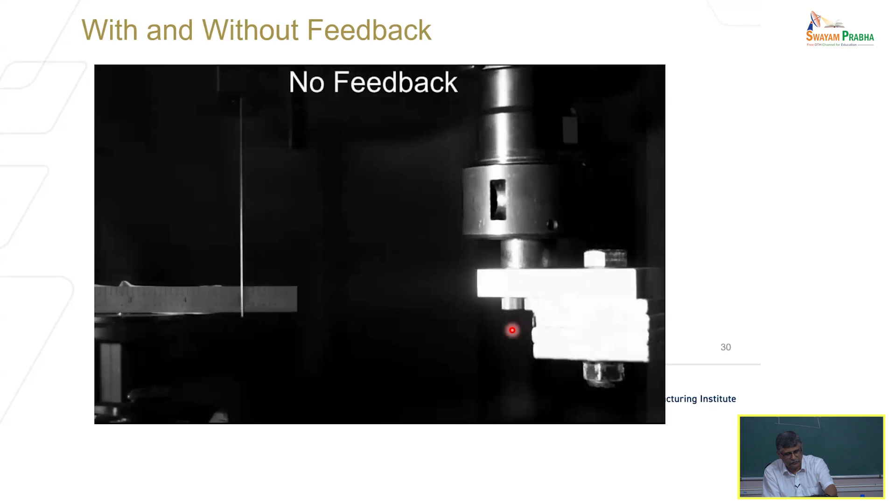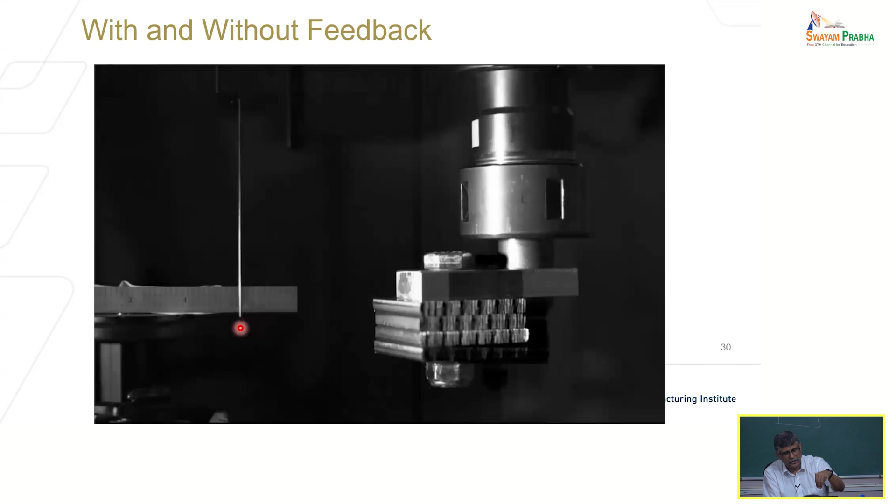Also, sir, you talked about series link and parallel link...

Joining two arms or something. Wouldn't that be comparatively stiffer than a single arm? You mean a parallel link would be stiffer than a serial link?

Indeed, that's one of the reasons parallel link mechanisms are used. But the challenge is your work volume reduces. So if you have a small work volume, you use multiple parallel links connecting to produce the motion. You can get greater stiffness, but you don't have the freedom of reach. The reach of this robot is huge, you're talking 1.5 meters or more, even 2 meters. You won't have that with that type of system.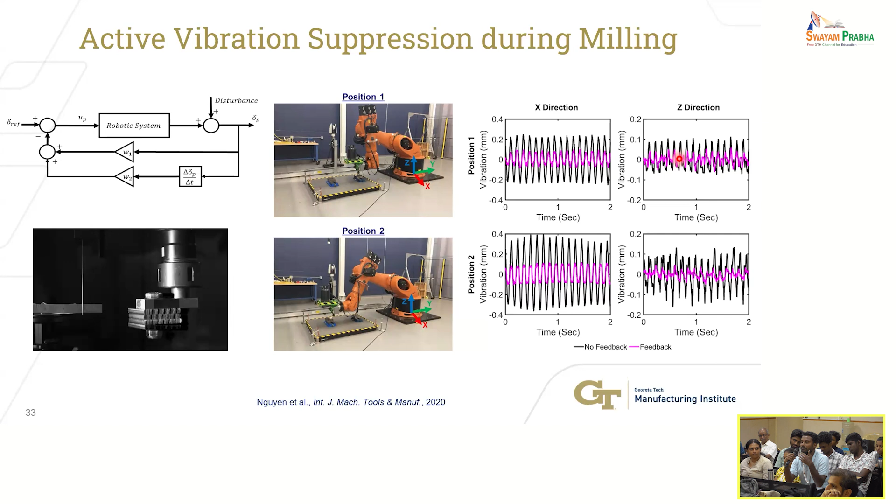Sir, I have a doubt. In the slide you showed, you used a single hammer test to model the system. But in the actual case, there will be a continuous force acting on the cutter, and it will also be varying with time, sir.

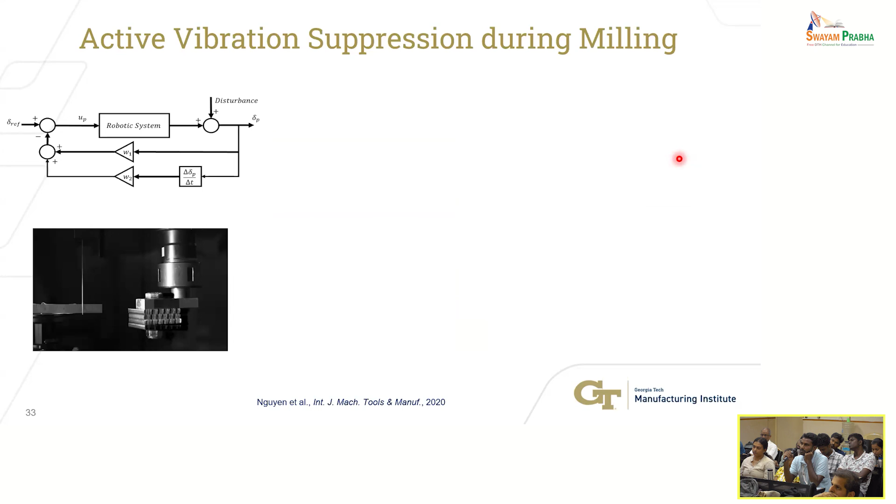Correct, how do we model such a system? That equation can model that. But I need to know what M is, what C is, what K is, and I also need to know what F of T is. So what I'm trying to find is its basic properties. For example, what I was trying to tell you, let's go back to that slide.

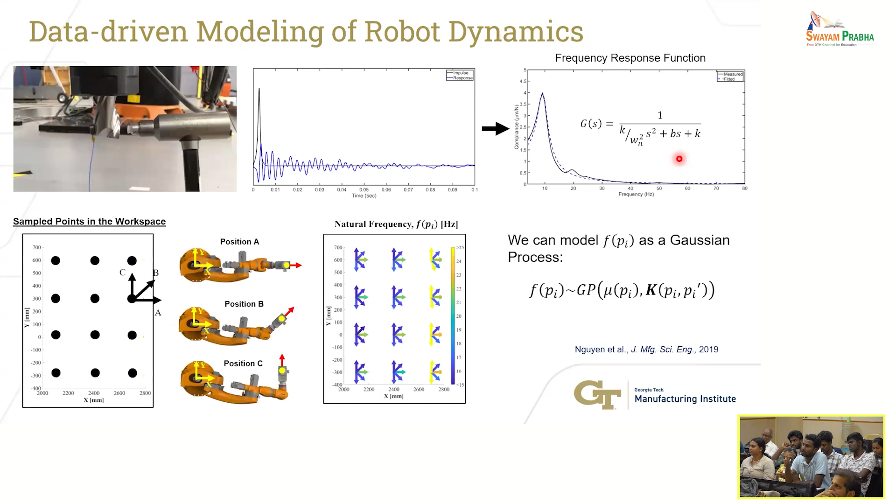Okay, so this is the impact hammer thing that you talked about. The purpose of doing this is to know what the basic vibrational properties, free vibration properties of that structure are. This is standard experimental modal analysis, a standard technique. It is not to simulate what happens during cutting, okay? This is to know the basic dynamic property of this mechanical system. So you excite the structure using an impact hammer, which gives you the free vibration response—in this case, the damped free vibration response.

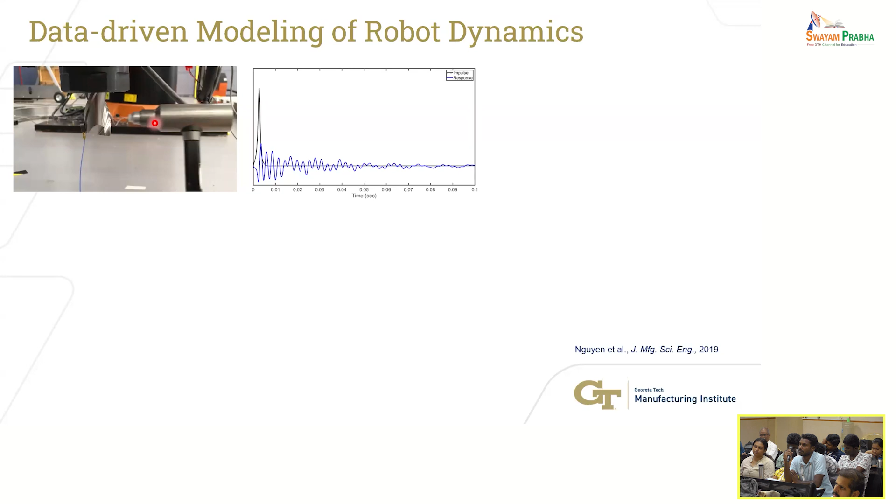Where I'm making an approximation is that I'm basically saying I can describe its free vibration response based on only the first mode of excitation. This is a complex structure. In reality, when you excite it, it will not only vibrate at this frequency, there will be other frequencies too. I didn't show you, but there are other peaks that may be excited. To describe its true frequency response function, I need to model all of them. But most of the energy associated with that vibration is contained in the highest peak, so I'm approximating its dynamic behavior by that one mode that gets excited.

I'm saying that if I somehow excite this, even if it is a machining force that's time varying, then of course that would be like a forced vibration. But if the frequency of force variation, F of T, is close to this frequency, it's going to excite the structure at that frequency. So if I know this, whatever the forcing function is, say I'm operating far away from this resonant frequency with machining forces, I should not have much displacement at all. My model will say that at, say, 950 hertz, amplitude of vibration is negligible. The model will say it. Does that answer your question?

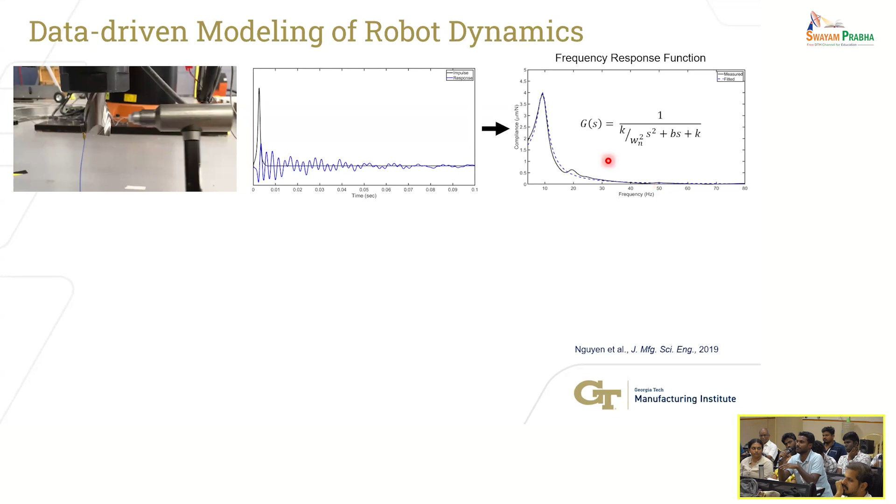Yes sir, one more question sir. Suppose you observe the system is under the natural frequency—the frequency of the system is matching its natural frequency. You have got the feedback to control it, sir. What parameters will be adjusted so as to control, to make the frequency not match with this natural frequency?

The easiest way to do that is to actually change your cutting spindle speed such that you make it much higher, far away—so you change F of T, the time variation, the frequency content of the forcing function, to be far away from the resonant frequency of the structure. That's the easiest solution, if you can do it: change the spindle speed and move it away. That's the simplest solution, right?

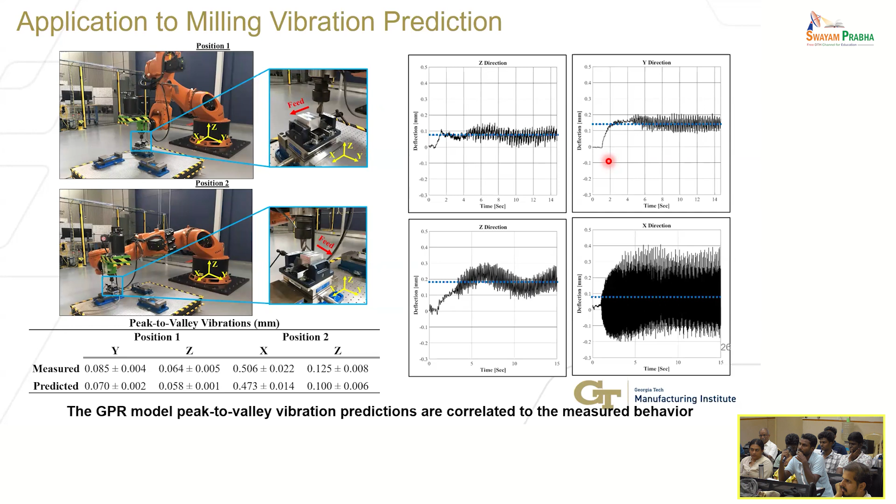If you're very close to the resonant frequency of the structure, there is a limit to how much you can actually suppress—you can't do much. The structure will vibrate, okay? And this is what I was showing.

But it turns out robots have the worst vibration behavior. Most robots have natural frequencies somewhere from 5 hertz to less than 20 hertz, typically 5 to 11 or 12 hertz. That's where, if you excite them—and those are easy enough to excite—that's why they'll vibrate a lot. The higher modes, we don't worry too much about. Does that answer your question?

The easiest solution would be to change your spindle speed, to make it far away from the resonant frequency of the structure, if you know what it is.

Yes sir, one more question sir. You told that the robot manufacturers won't be giving this sort of data. So if we have a robotic system for a company, the company has to calibrate its robotic system so as to automate that. Correct, so it goes for every company—there cannot be a single stop solution for all the robots to make it happen, sir.

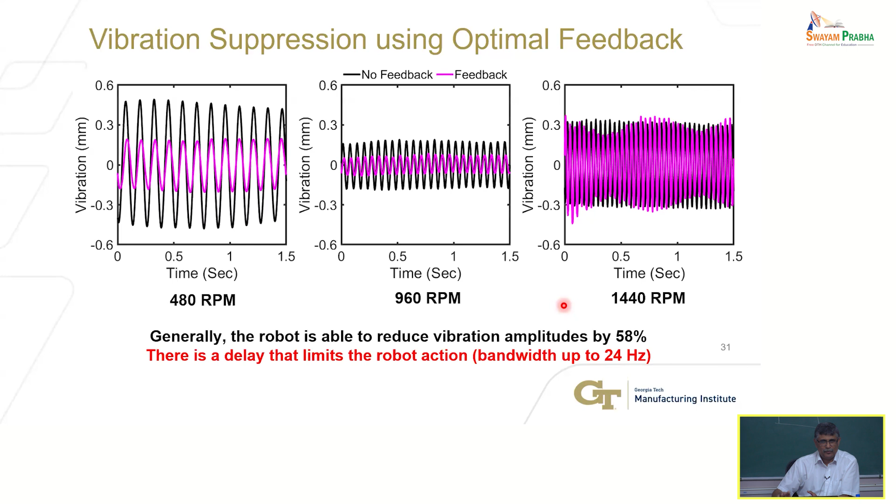No, you're right that in industrial environments characterized by high product mix, and rapid changes in product mix due to changing demand, you need a more flexible manufacturing system which can be reprogrammed easily, repurposed easily, which robots certainly provide one option for. But it depends what you're making.

Again, the reason the aerospace industry is driving some of these technology developments, why they're interested—I guess I didn't do a good enough job of clarifying that. But the reason is, as I said, assembly processes in aerospace are very time consuming and laborious.

You order a plane today, you'll be lucky if you get it in 4 years. Why? Because most of these aircraft manufacturers have backlogs of 2,000 to 3,000 planes. They cannot produce them fast enough. It's not like automotive manufacturing, mass production. These are very complex systems that take a long time.

So they want flexibility. They're dealing with these very large structures, and the cost of machine tools for machining those types of structures is millions of dollars. Once they spend that, they occupy a huge amount of space, and they're not going to get rid of it tomorrow easily. So those are some of the reasons aerospace is driving this, and why they can benefit from speeding things up.

There are many other applications in aerospace, including assembling cabling in an aircraft. Right now, humans have to get in there to put bundles of cables into an airframe structure. It's very difficult to automate that when you're dealing with those types of parts.